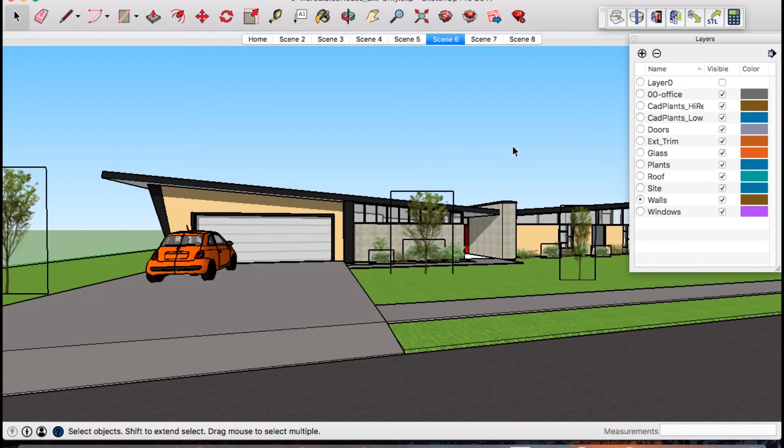Here you're looking at the model in SketchUp of the Incredibles house that I made. As I mentioned, I modeled this a few months ago, I don't remember exactly when. I'll put links to the video of me doing this model, as well as some images of the finished rendering, so you guys can see that. I have a playlist for this project. Here you can see it, that's the Incredibles house and the site I did for it.

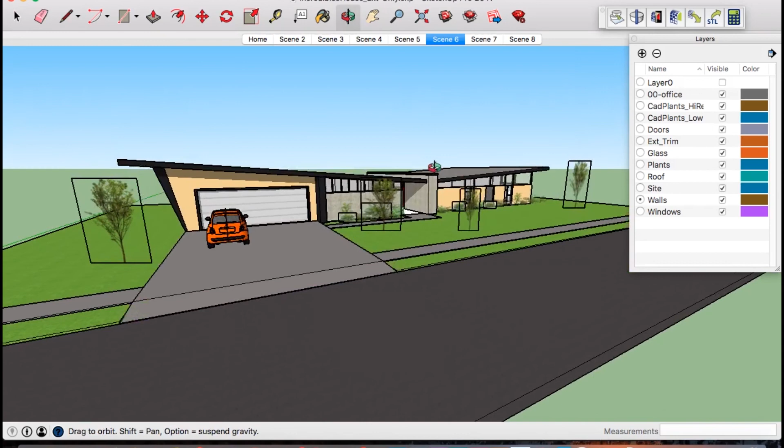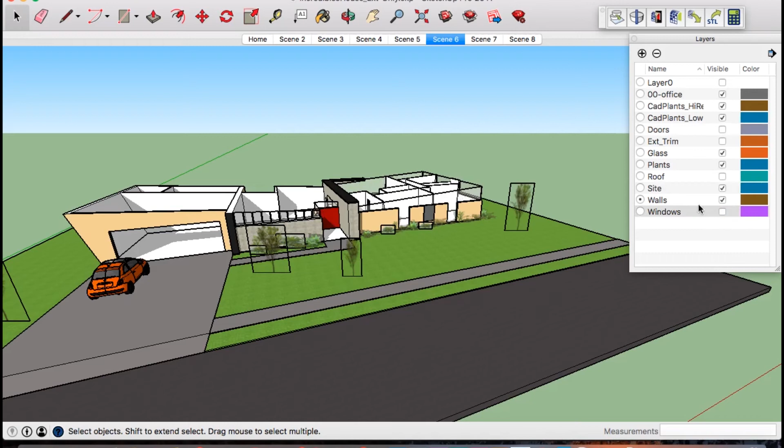In order to 3D print this, we have to get rid of a lot of the geometry on the outside. So I'm going to do it without the site and without any of the trees. The easiest way to get rid of it is to just turn off layers. I'm going to leave the plants on, and turn off any layers we don't need while keeping glass. I think that'll do it, and that one too. Now everything else that's left needs to go away, so we can just select it all and delete. Good. Now if we turn back on the roof and the walls...

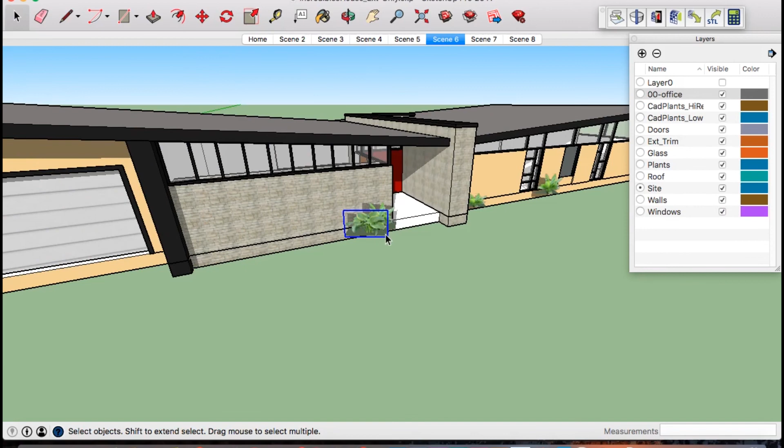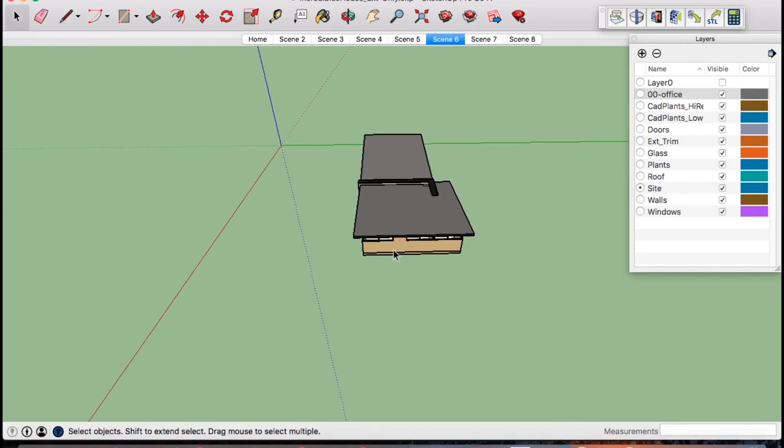There seems to be a couple of plants left, so we can just delete those manually, kind of like that. I want to turn off the shadow as well, since we don't need the shadow because we're not rendering this right now. Okay, there we go, so all of the site is gone. I also want to get rid of the lines I brought in to model it, we can get rid of that. Now we have just the house.

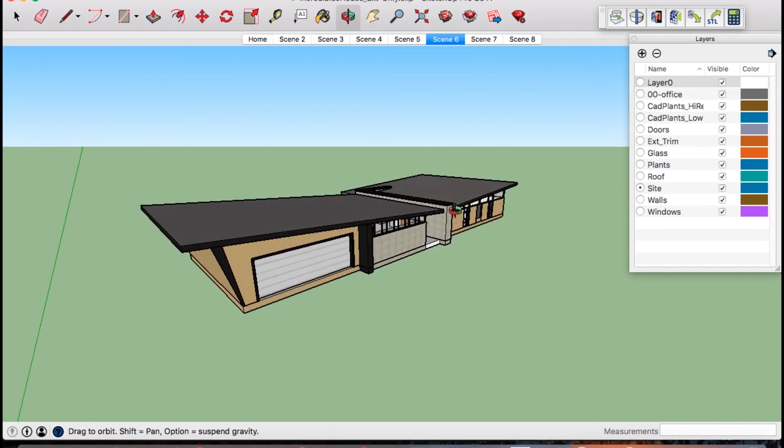Next step is to clean up the materials a little bit. So now I've also just gotten rid of all the materials, just for my sanity. It was easy enough, you just select everything and change the materials, and I got rid of the thickness of the floor because I don't think I need that.

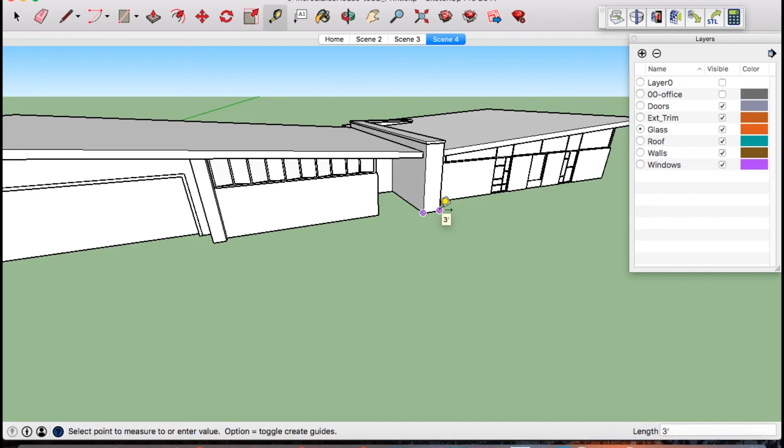So I think now we're almost ready to export. The next issue is the size. When you're modeling in SketchUp for architectural renderings, you model it at full size, so you can see this is 3 feet. Right down here where it says length, it'll give you the size. When I measured that, it's a 3-foot wall, which is what I had figured out the thickness of that wall to be.

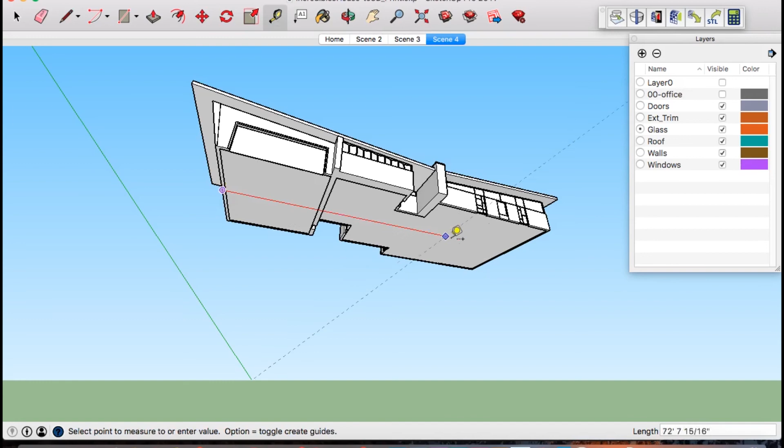So we obviously don't want to export it at this size because it'll be a massive model. Let's think about this for a second: what is the length of the entire house? If we measure from the center of that wall to this most exterior edge, we get 105 feet and 9 inches. So that's pretty big.

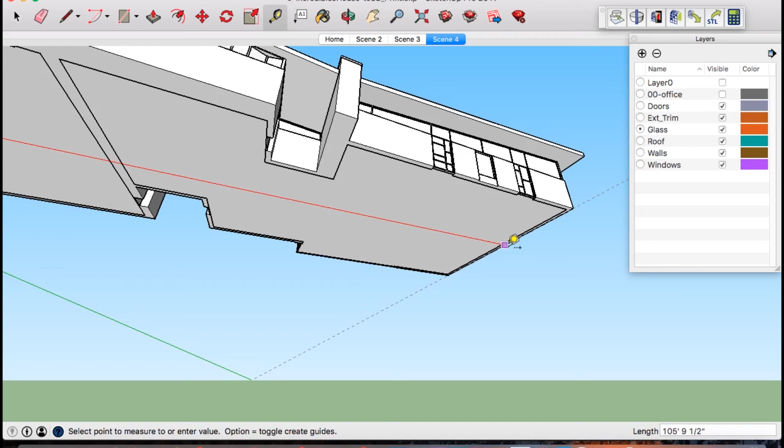So I don't think I'm ever going to want to print this at a quarter scale. I'm talking about architectural scales here, and you guys can't see this because I'm holding a scale in my hands, but I'm trying to figure out how big this is going to be. At a quarter of an inch, basically a foot gives you almost 50 feet, so that would be almost a 2-foot model, which is too big.

Even at 1/8 of an inch, it's a pretty big model, so I don't see myself ever printing it bigger than that. That's 1/8 of an inch equals a foot, which is U.S. architectural scale. If you're looking at this from a European country or anywhere outside the U.S., this may not make sense. Basically, this wall, which measures 3 feet, is going to end up being 3/8 of an inch wide, about 9.5 millimeters. I know the metric system, but unfortunately here we don't use it at all, and we have to go by what's being used.

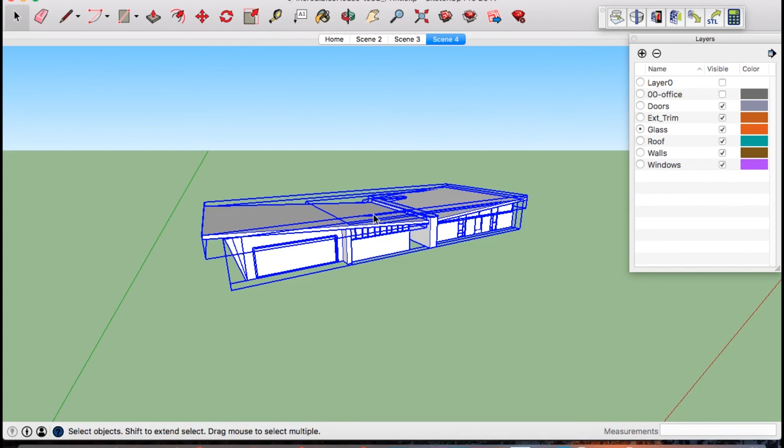So what I'm going to do is scale this down. I've selected the entire model, and I'm going to use the scale tool over here. You have to select a corner, so it's going to scale down to this point from this one, and now I can scale it as much as I want. You can see down here it tells you what scale factor I'm using—at 1 means it's 100%.

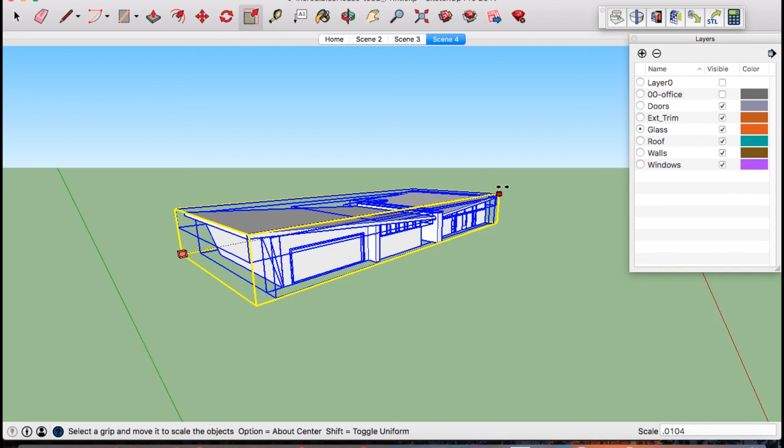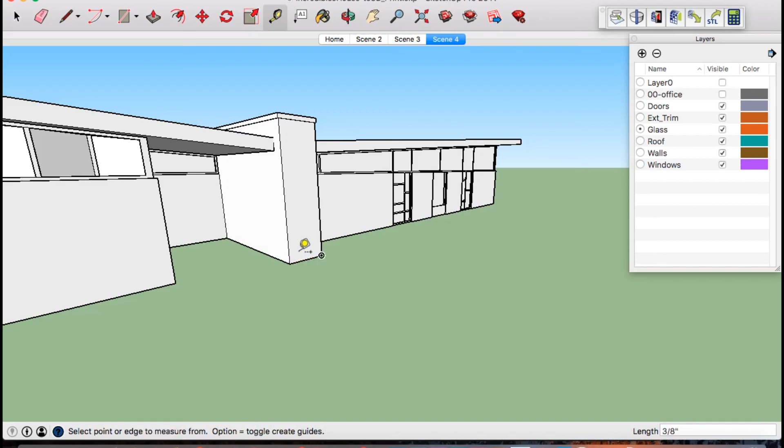So I did some quick math, and to scale it to 1/8 of an inch equals a foot, you would need to scale it to basically 1.04%. In this case it's going to be 0.0104. We hit enter, and there you have it—we've now scaled this down to 1/8 of an inch equals a foot. Remember, this length here was 3 feet; if I measure it now, it's 3/8 of an inch. So this is the perfect 1/8 scale of the house.

Now we are almost ready to export it. What I also want to do, because we're going to 3D print this, is I don't want to leave it at imperial measurements like it is—I don't want to leave it in feet and inches. We're going to convert it to metric, which is simple enough.

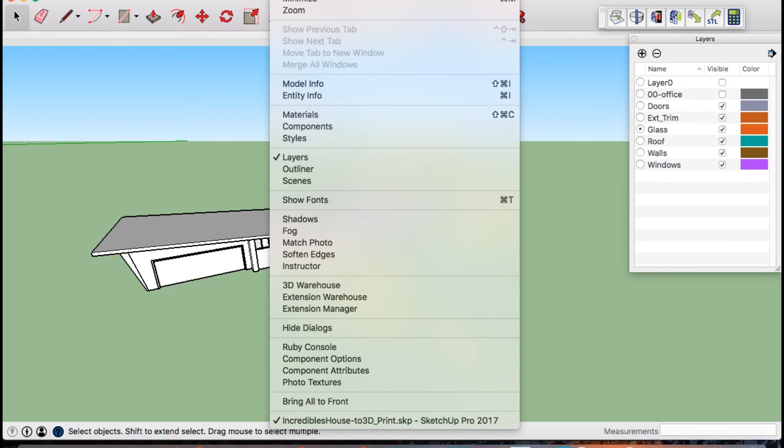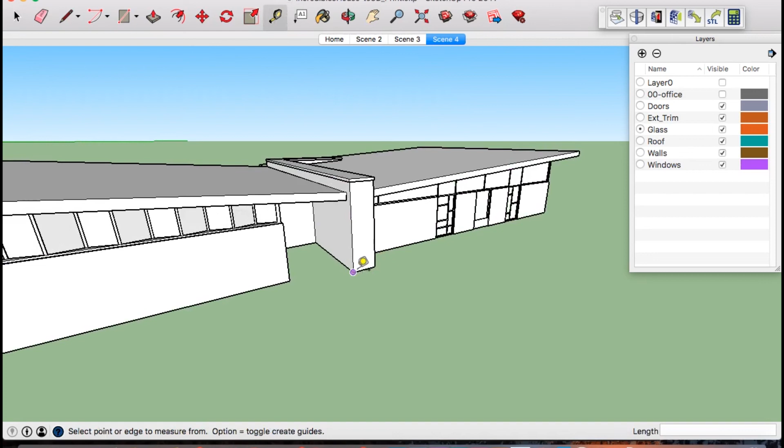It is under Window, Model Info. Here we're going to switch from architectural to decimal, switch it to millimeters, and then we just close this window, and that's it—now we are in millimeters. Remember how I said this was 3/8 of an inch, which is about 9 millimeters? And there you go, 9.5. So just like that, we're all set.

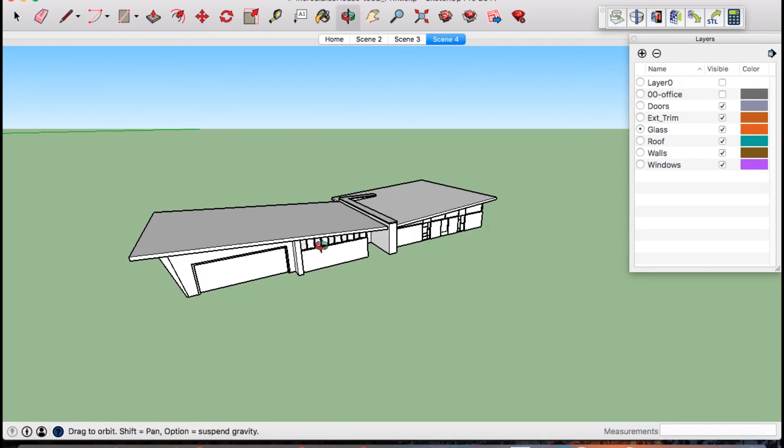We are ready to export, and we're going to use a plugin for that. What's important to note about this plugin is that this has to be a closed model. Now, if there are little gaps, the software will take care of it for you, but make sure you at least have a base for your model—like you couldn't be without the floor in here.

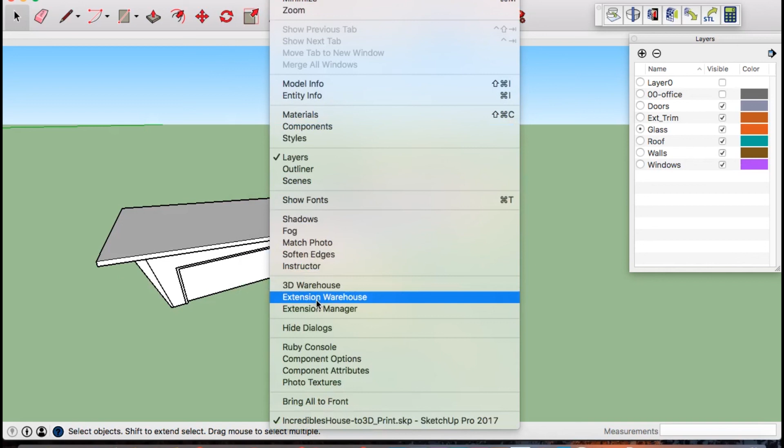Now, the plugin is this toolbar that you see up here, and I'll show it to you. I keep calling it a plugin, but in SketchUp they're actually called extensions. This particular extension is called CADspan Tools, and it comes with a couple of different tools. If you had modeled this for the sake of 3D printing, you could just save it right to STL—that's what this one will allow you to do.

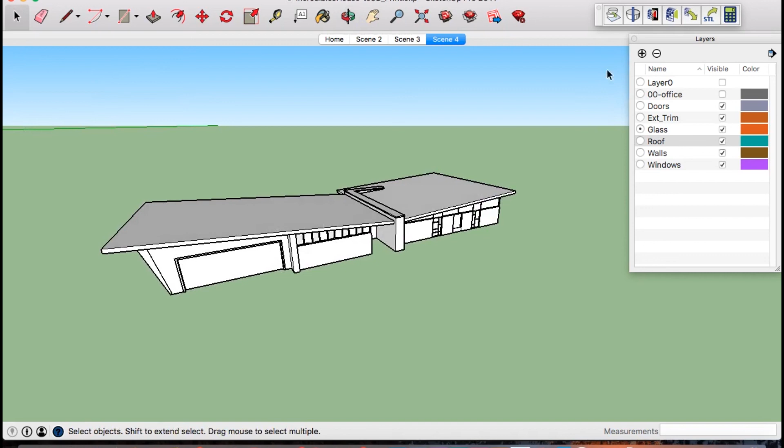Now the problem is, if I save this right to STL, all the interior geometry will export with it and it'll take forever to print. It'll try to print all the interior geometry, which you'd never be able to get to. So what we're going to do is click this little button here, which pulls it up—it is the Resurfacer.

Oh, and I got to log in. So, okay, all logged in. So this is the Resurfacer—this lets you get rid of basically any internal geometry without you having to do it yourself. I don't typically mess with any settings here; I just click upload, say yes. I'm going to tell it millimeters because we switched to millimeters, remember. Hit OK.

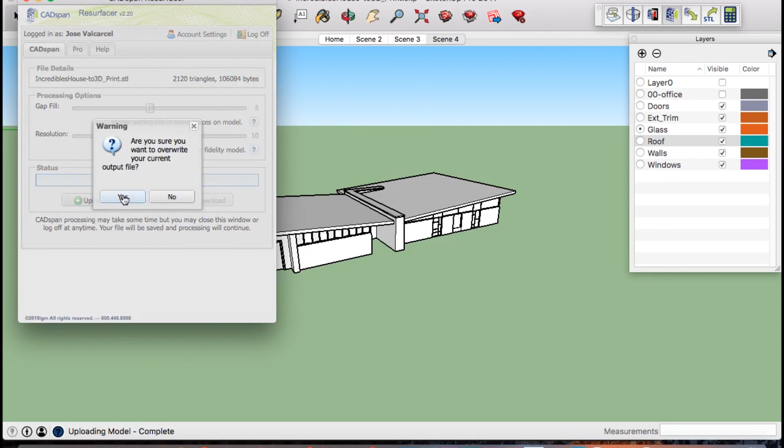Okay, the file has been uploaded, and now we just click process. Yes, this can take a while. It'll assign it, once it's assigned it'll process it, and then once it's finished processing it'll let you download it. So we're not going to sit here for the whole thing.

Once this is done, we'll come back and we'll have it downloaded. It'll actually download an STL file, so we'll be all set to go to Cura. Let's just... well, I actually did it already, so we'll switch over to that and not sit here and wait for this.

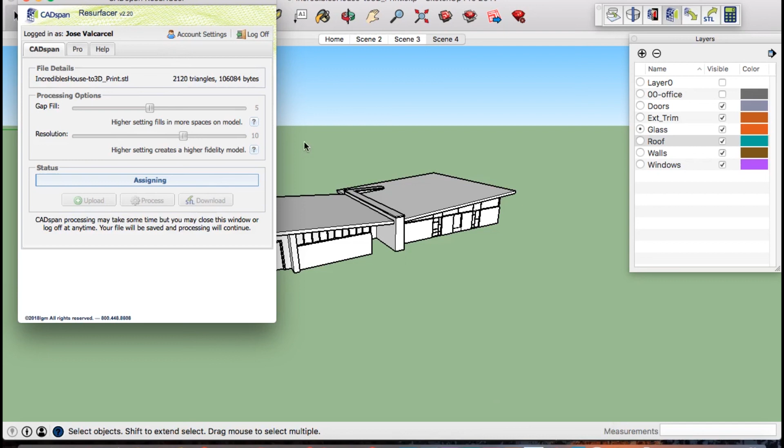Alright, so when we last left off we had this, and we had put the Resurfacer on, and we had sent it off. So now let's go off to Cura.

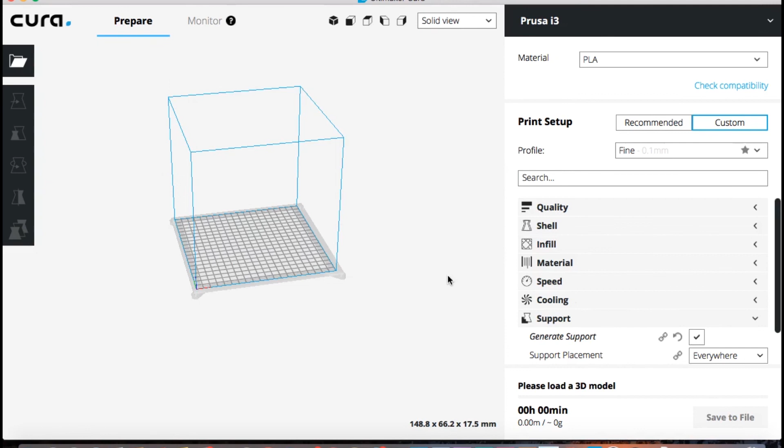This is my preferred software for prepping my 3D prints. We're going to go ahead and open the file, and I'm going to go to the file that I downloaded. There it is, I'm going to open that, and now here we are.

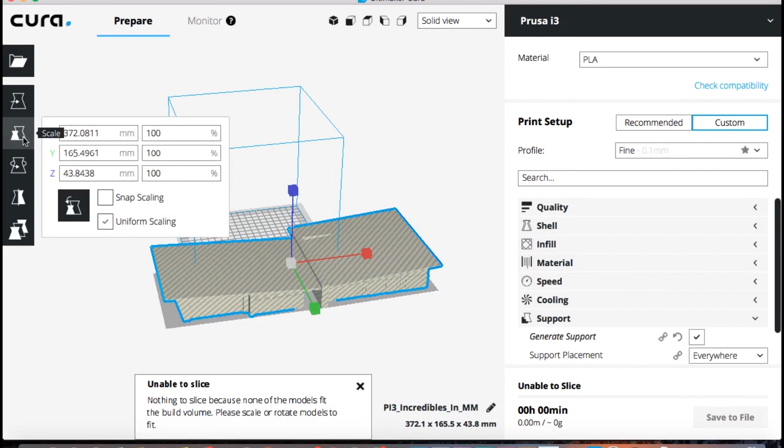Now because I made it 1/8 of an inch, this is bigger than the surface of my 3D printer, but that's okay. This just sort of tells me how big it would be. I could print it up to this size, or bigger really, but we'll scale it down for the sake of this. I think it'll fit at 40%.

I would prefer to go probably 50% because then I know it's a standard architectural scale, but you know, it's not a big deal.

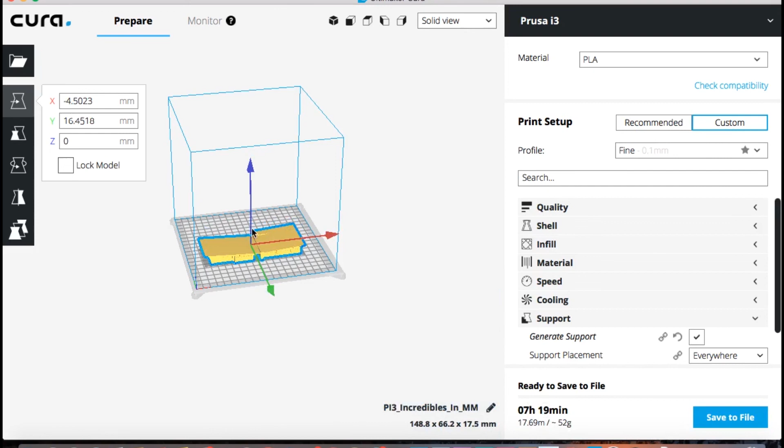For the sake of this, I think at this size it's going to take forever to print. So let's just see - we are looking at 7 hours. Yes, I'll probably just print it this size for now. But, you know, here's our model, our STL.

I'm going to want support, it's good. For the sake of showing you, let's go to the layer view. So there it shows you the supports. Just turn off the supports for a second.

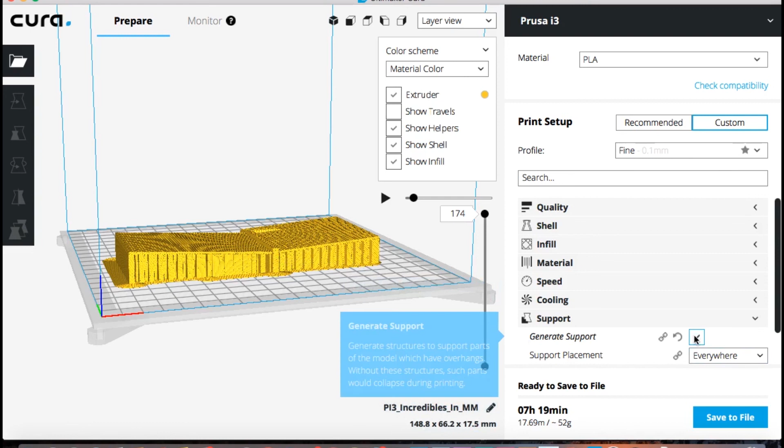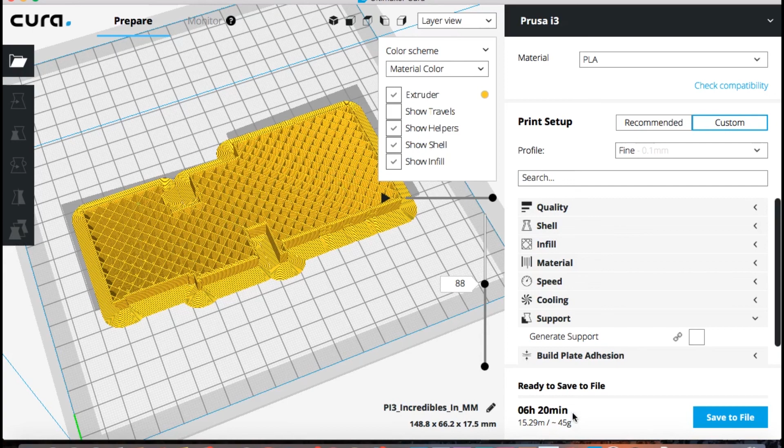Here we are. So what I wanted to show you is that to prove there is no internal geometry, you can see how it's just infill in the middle, right? Had I not run it through that resurfacing process, we would see every single wall in here, and it would be a nightmare. I mean, this is going to take 6 hours to print at this rate anyways.

What I'll do is set the supports back on. We'll export this file. But yeah, 7 hours, we'll go ahead and print this.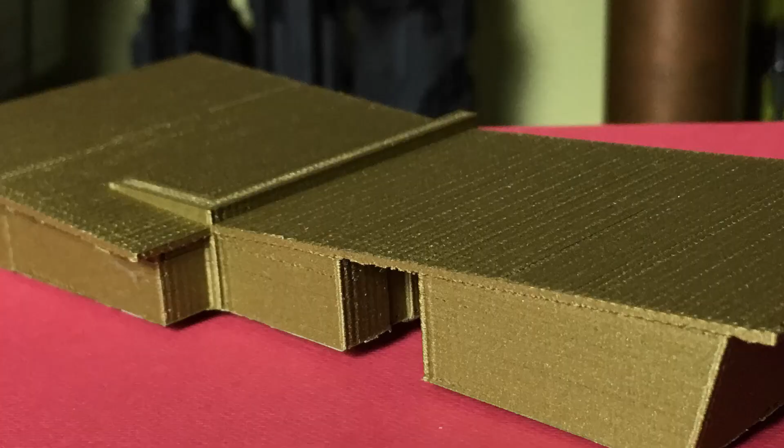So there you guys have it, that's how I 3D printed my model of the Incredibles house. Like I mentioned in the video, I'll put some photos up. I have this model at 1/16 inch scale, which is smaller than 8th. I don't know how familiar you guys are with architectural scale, but this is an architectural scale, so look up architectural scales and you can get a little more familiar with it.

And like I mentioned, now I have it at 1/16 inch scale. I'm going to print it at a 1/8 inch scale eventually - I'll probably print it before the movie comes out and do another video on it.